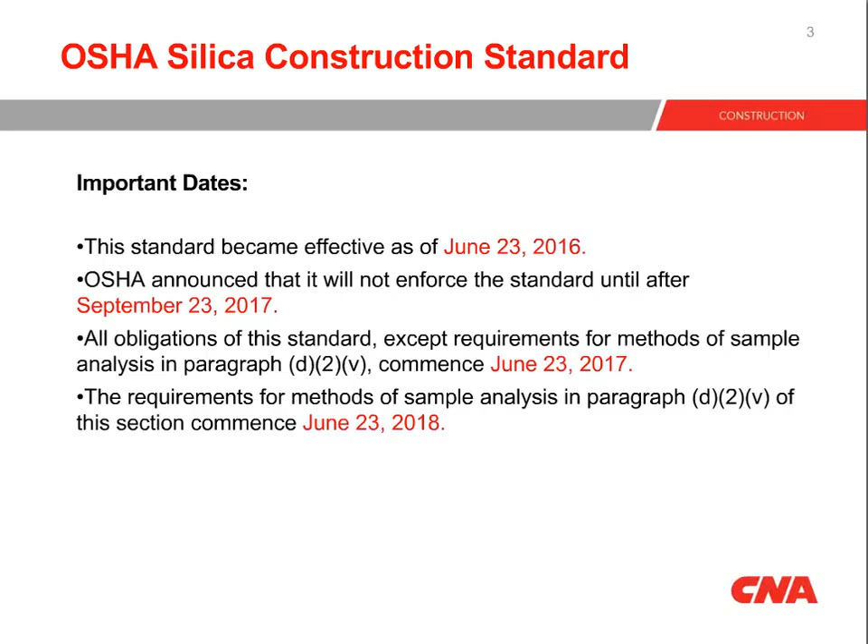Scope and application of the standard. This is what the standard applies to. It applies to all occupational exposures to respirable crystalline silica in construction work, except where employees' exposure will remain below 25 micrograms per cubic meter of air at an 8-hour time-weighted average under foreseeable conditions.

Now, the 25 micrograms per cubic meter of air, that's what they call the action level, which is the level that OSHA requires increased industrial hygiene monitoring to begin at. How do we determine if our construction work is under that action level, that 25 micrograms? Well, the biggest thing we do is air sampling.

We can use historical data, and that's why OSHA established Table 1, which we're going to look at more closely a little later. It's 18 recognized activities where historical data has proved to be over the 25 micrograms. We also can use trade data, air exchange calculations, but basically, if you see a dust cloud, you're probably going to be over that 25 micrograms.

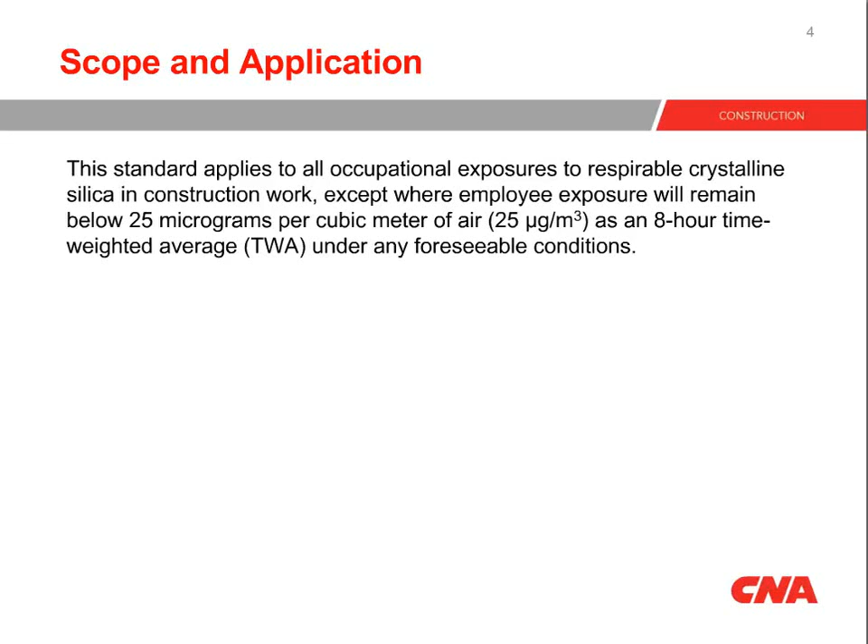Now, if you can prove that the exposure is under that action level of 25 micrograms, then you don't fall under the scope of the standard. But the only real way to prove this is through air sampling. And in construction, we have to be careful of that because our job sites and projects are so dynamic, the conditions are always changing. So what might be good one day might not be good the next, depending on weather conditions.

All right, the requirements of the standard. The standard requires that employers limit worker exposure to respirable crystalline silica above the PEL, the 50 micrograms over an 8-hour day. Now, when we talk about respirable, we mean breathable. The silica particles have actually been processed or broken down small enough to breathe into your lungs, either through grinding, polishing, chipping, that type of thing.

The PEL of 50 micrograms, we have to remember, has been reduced from the original 250 micrograms per cubic meter of air that OSHA has established over the past 50 years. So we're dealing with really 1/5 of the exposure of what we've been used to. We have to establish and implement a written exposure control plan that identifies the tasks that involve the exposures, and we have to implement engineering controls.

Now, the written exposure control plan is really no different than a job safety analysis or a job hazard analysis. In a nutshell, we identify the exposure and we describe how we're going to control it. At an OSHA-sponsored seminar I attended, they provided a website, and we're going to look more closely at this website later on. It's www.silica-safe.org. It actually walks you through completing one of these plans.

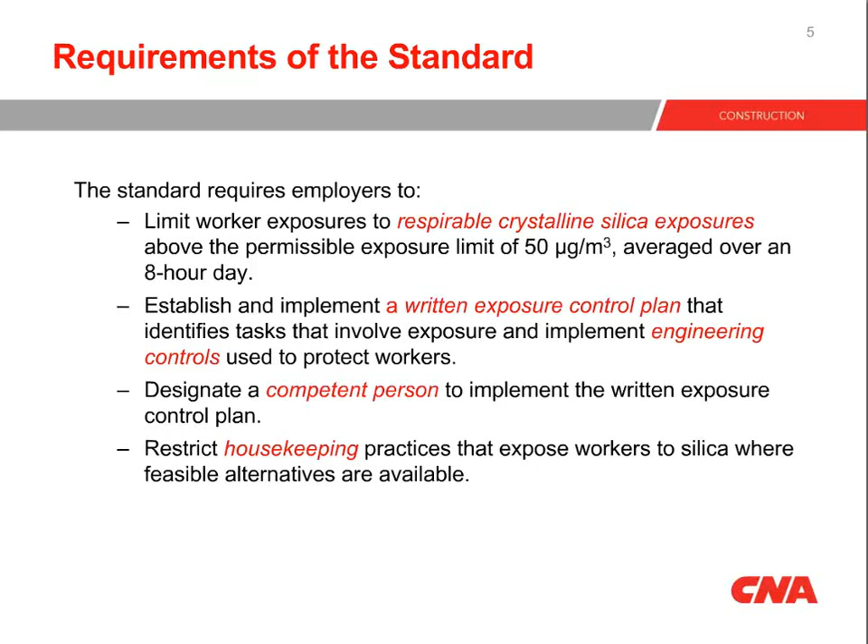Continuing on the requirements, we have to provide respirators to workers when engineering controls cannot limit the exposure to the PEL, the 50 micrograms. Now, when we reference respirators in this new silica standard, it's under the assumption that we're in total compliance and up to speed with the current respiratory protection program that has been in place since, I believe, 2007. We need to offer medical exams, including chest x-rays and lung function tests, every 3 years for workers exposed at or above the action level that wear respirators for 30 days or more per year.

We have to keep records of the workers' silica exposures and all the medical records for 30 years. And we have to train workers on operations that result in silica exposures and the way to limit them. Now, if an employee wears a respirator for 30 days or more a year, we're going to have to follow the medical surveillance requirements. So we're going to talk in more detail about that in a little bit.

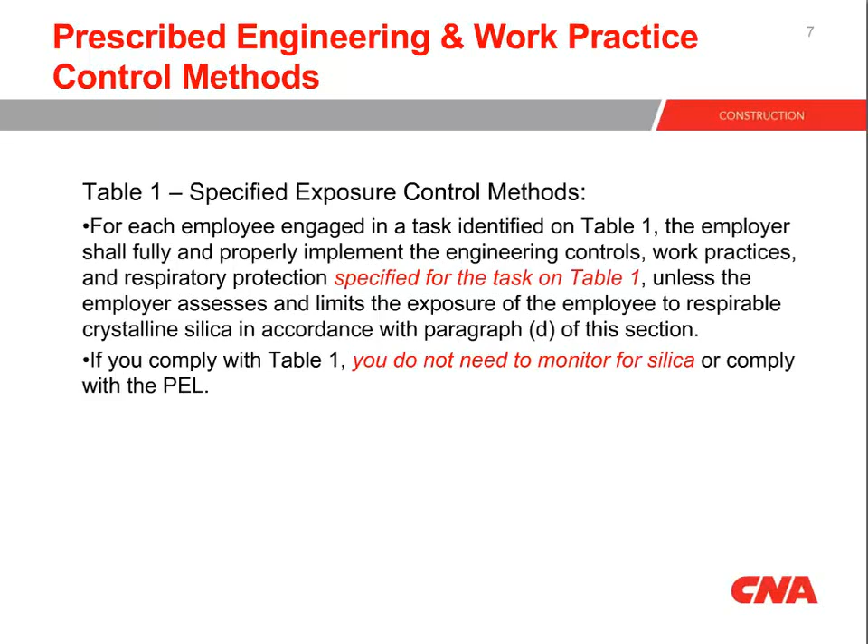Prescribed engineering and work practice control methods. Table 1, specified exposure control methods. For each employee engaged in the tasks identified on Table 1, the employer should fully and properly implement the engineering controls, work practices, and respiratory protection specified for the task on Table 1. If you comply with Table 1, you do not need to monitor for silica or comply with the PEL. Let's look at the next slide here to give you a better idea of it.

Now, this is just a small screenshot of Table 1. OSHA identified 18 common tasks or activities that produce silica above the PEL, and they placed them in a table along with the engineering controls and the respiratory requirements to reduce the silica exposure.

If you look up toward the top left corner of that slide where you see 1926.1153(c), if you go to the OSHA website and put that number in the search engine, it'll bring up the complete Table 1. It's actually 2.5 pages long. If you want to reference the complete silica standard, it's found in the 1926 construction standard under Subpart Z, which is toxic and hazardous substances.

You'll see in this small screenshot here, I've highlighted some boxes in red. How you read this table: if you go down on the left side where it talks about equipment and tasks, you go down to the second item there, number II, handheld power saws. This can be as simple as a handheld gas-powered concrete saw, which many contractors are using nowadays. That's the equipment. Engineering and work practice control methods.

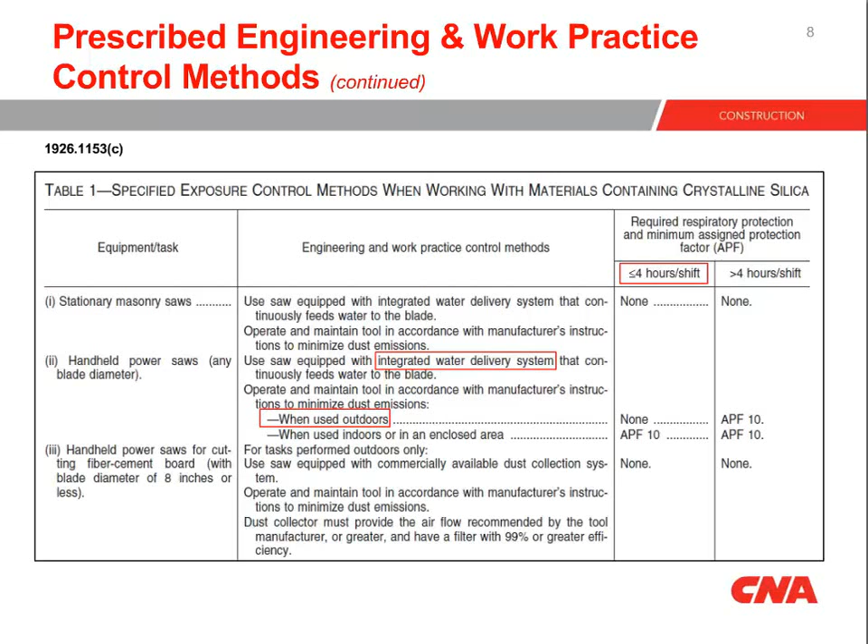All right, these are some initial notes that go to Table 1. If you perform a task indoors or in an enclosed area, provide a means of exhaust as needed to minimize the accumulation of, here it is, visible airborne dust. For tasks performed using wet methods, apply water at flow rates sufficient to minimize the release of visible dust. Again, visible dust. In other words, if you're putting water on it and you can still see dust, we're not putting enough water on it.

The next bullet point there has to do with construction equipment, things like excavators, loaders, any type of construction equipment out on the job site. And those tasks are actually in Table 1. They're the two very last, number 17 and 18, on the last page of Table 1.

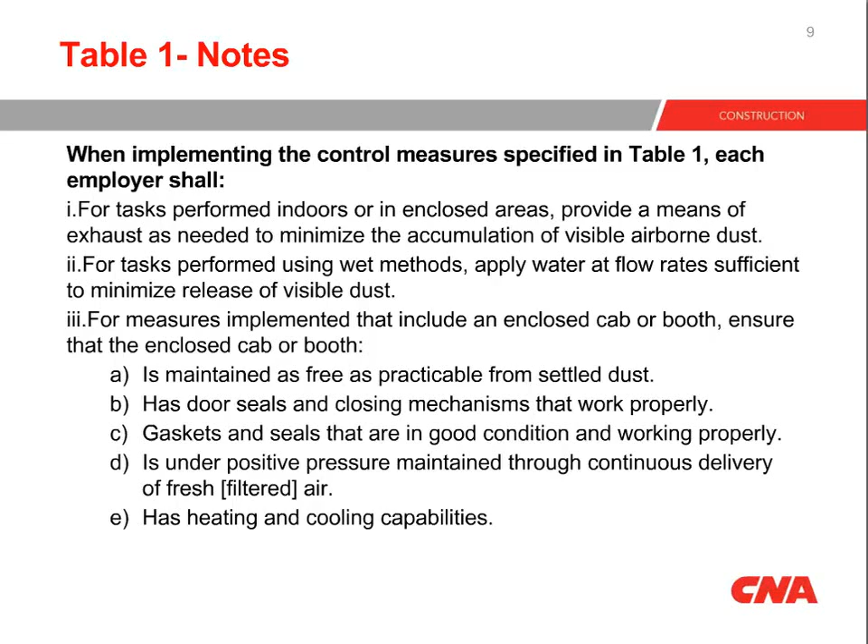They have to do with the equipment, and you need to make sure that you have an enclosed cab or booth, that you have all practical settled dust out of the cab, all of your door seals and window seals are in good shape, positive pressure is maintained throughout the cab, and there's a heating or cooling system provided on it. And again, we're going to answer questions on a lot of these different things afterwards.

So, all right, if the task is not on Table 1 or you decide not to use Table 1, then you have to go to the alternative exposure assessment options, so get ready for air sampling or scheduled monitoring. Hands down, if you can, by all means use Table 1; it's the way to go if possible. I'm going to go to the next slide here that gives a little better interpretation of it.

These are the alternative exposure control methods. You have the performance option and the scheduled monitoring option, and basically they both involve air testing or air monitoring. The scheduled monitoring option is done over an 8-hour time-weighted period, and you will place the monitoring badges on employees. You want to make sure that you select an employee that is expected to have the highest exposure to the respirable crystalline silica.

You can do representative sampling monitoring, which according to OSHA can be around 10%. And you've got to watch out when you do this air sampling, because job sites are so dynamic, which means the conditions are changing from day to day, whether it's the humidity, the wind direction, the speed. What might be good one day might not be good another day, so you really have to watch out about that.

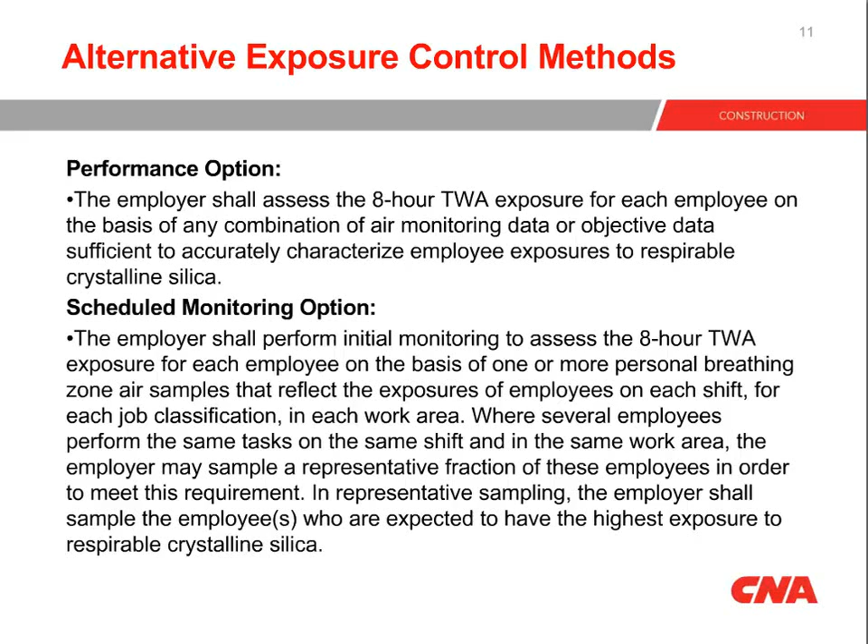All right, if you do conduct the air sampling and monitoring, you then have 5 working days to notify each employee of the results. Whenever an exposure is above the PEL, the employer has to provide a written notification describing the corrective action to be taken to reduce the exposure. And basically the corrective action can be engineering controls or, worst case scenario, respirators.

Air monitoring, the employee's rights. If you perform air monitoring, the employer shall provide the affected employees that are engaged in the monitoring, and their designated representative, which for the most part we're probably talking union rep, the opportunity to observe the monitoring process.

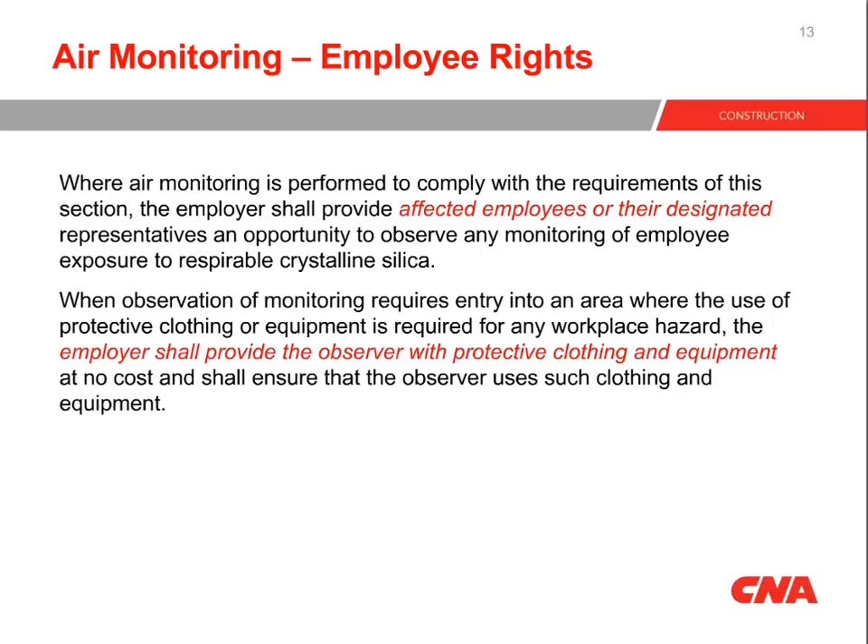If while doing the monitoring there's any specific PPE, personal protective equipment, anything like that that the employee needs or the representative needs, we have to supply that as the employer at no charge. It could be as simple as safety glasses, hearing protection, a Tyvek suit, anything like that.

Methods of compliance. This slide here basically deals with or emphasizes the hierarchy of controls. We always try to engineer out the exposure first, and as our last resort, we resort to PPE, and in this case it's going to be respiratory protection.

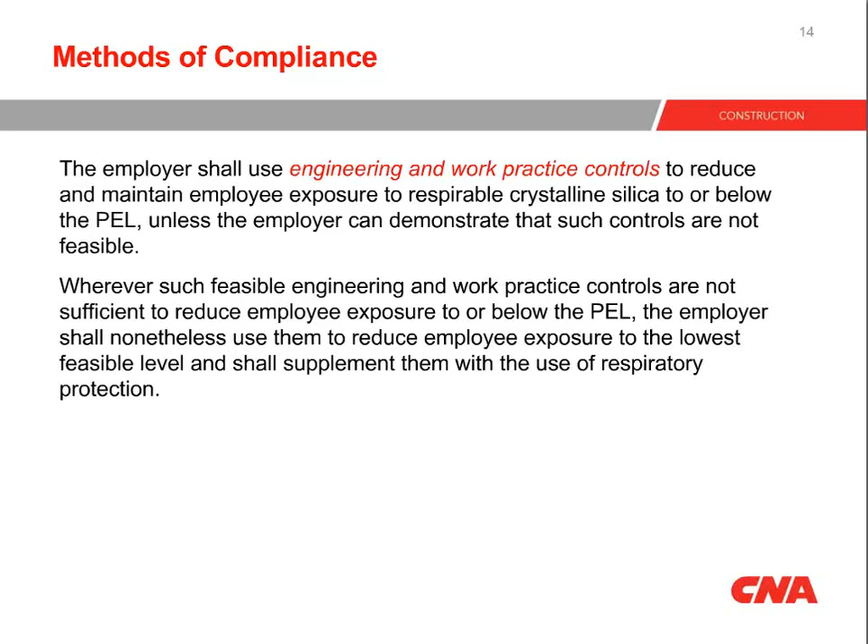Housekeeping requirements. The employer shall not allow dry sweeping or dry brushing where such activity could contribute to employee exposure to the silica, unless wet sweeping, HEPA filtered vacuuming, or other methods are not feasible. We have to be very, very careful when we talk about not feasible on this. It's very difficult to prove to OSHA that using one of the engineering controls is not feasible.

The employer shall not allow compressed air to be used to clean clothes or surfaces where such activity could contribute to employee exposure to the silica, unless the compressed air is used in conjunction with a ventilation system that will effectively capture the dust cloud created by the compressed air. This could be important for concrete grinding or the polishing operations, where the machine's vacuuming system actually collects the dust.

We have to make sure, and the OSHA industrial hygienist also emphasized this when I talked to her, that we need to control the dust when we're emptying the collection bags on the machine or we're cleaning out the filter. It doesn't do any good to go through the process of collecting all this dust and then at the end of the day have that high concentration of dust and expose the employee to it while we're cleaning the bag out or the filter. So that's something to make note of.

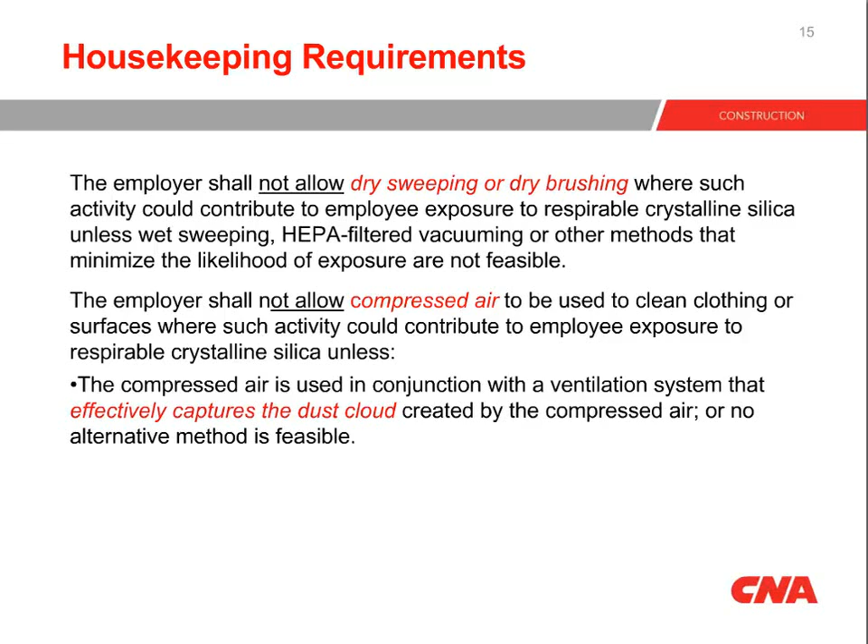All right, let's talk a little bit about the written exposure control plan. A lot of people have a problem with this, trying to figure out, oh my God, what is that? How are we going to develop it? Well, we're going to help you with that. The employer shall establish and implement a written exposure control plan that contains at least the following elements.

We need to describe the task that involves the exposure to the silica, whether it's grinding, polishing, chipping, anything that's breaking down the silica particles so they're breathable. We need to describe the engineering controls, whether we're going to use water or a vacuuming system, work practices, if we're going to use respiratory protection, and the housekeeping measures used to limit the exposure, not only to our employees, but we might be on a multi-employer job site.

And again, this written exposure control plan is much like a job hazard analysis. Here's what the exposure is. Here's how we plan to control it.

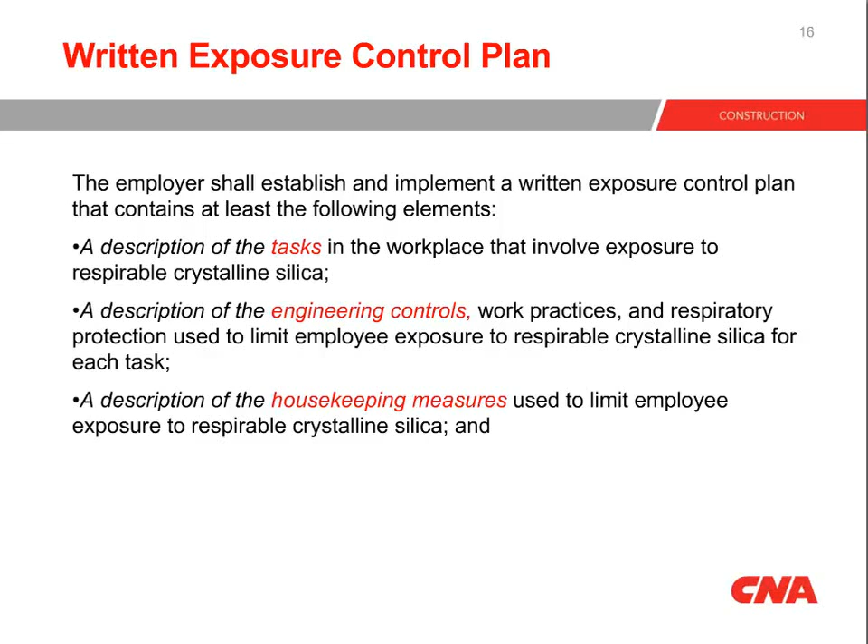Continuing on with this plan, a description of the procedures used to restrict access into the work area when necessary. Again, we might be on a job site where we have a lot of different trades. We have to make sure that we control the dust that we are producing for everybody. That might be cordoning off the area or restricting access into the area where the operations are happening. We have to designate a competent person.

There's a lot in these last two slides about this written exposure control plan, and this is a big part of this whole silica standard for construction. I mentioned earlier that during one of the OSHA-sponsored seminars I attended, they provided a website, www.silica-safe.org, that actually walks you through completing the plan. While CNA doesn't officially endorse this website, I signed into it, completed a plan, and found that it was a very simple process.

I've been encouraging all the contractors and clients that I work with to do the same. To get on the website, develop a plan, use it as a template for future exposure control plans. Because for the most part, what we're doing day in and day out is not really going to change. So that plan is going to be able to be used over and over.

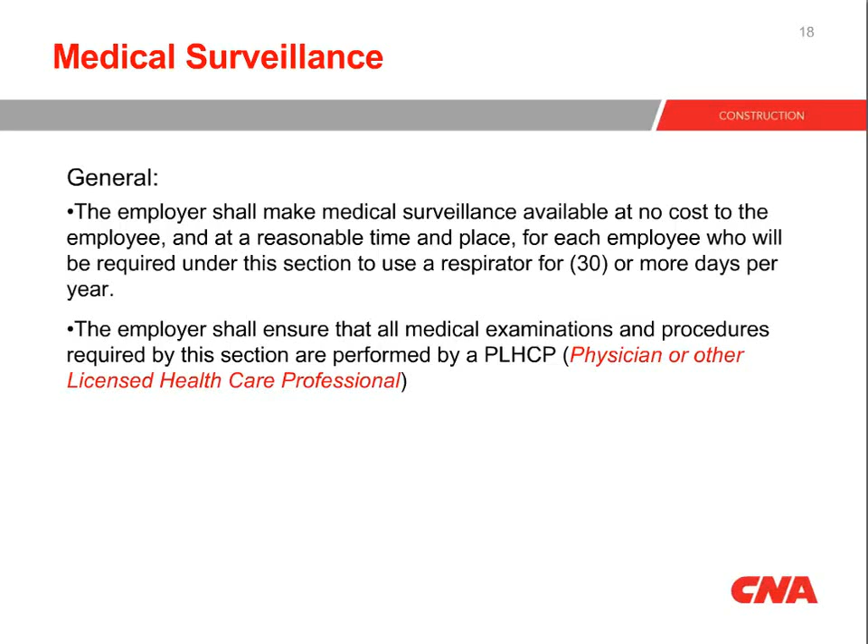Continuing on the medical surveillance. The employer shall ensure that the physician or the healthcare professional explains to the employee the results of the medical examination. Now this is only to the employee, all right? You have to contact the employee within 30 days of the medical examination. A statement, which only the employee gets because of the HIPAA laws, is going to indicate the results of the examination, to include any medical conditions that the employee might have that would increase the health risk for exposure to silica.

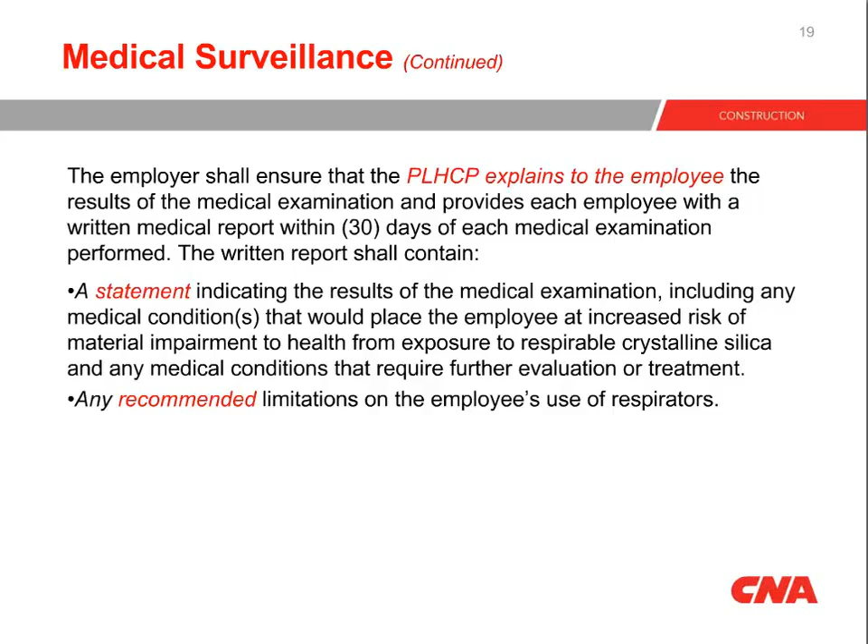And also, the healthcare professional or physician has to provide a recommendation within 30 days to the employer on any recommended limitations of the employee using a respirator. One more slide on medical surveillance, continuing on that. And this is basically for the employer. Any recommended limitations on the employee's exposure to the silica has to be made in a statement.

I tell you, if you get a statement from a physician or a medical professional that says that there's going to be complications if this person wears a respirator, due to the additional cost and the additional tests and that type of thing, I would highly recommend that person probably should not be one of the people designated to wear the respirator. Because eventually that's going to mean more cost to you as the employer.

The employer shall obtain a written medical opinion within 30 days. The written opinion shall contain the date of the examination on the employee, a statement that the examination meets all the requirements of the Silica standard under this section, the medical surveillance, and any recommended limitations on the employee's use of a respirator, or that there are no limitations on that.

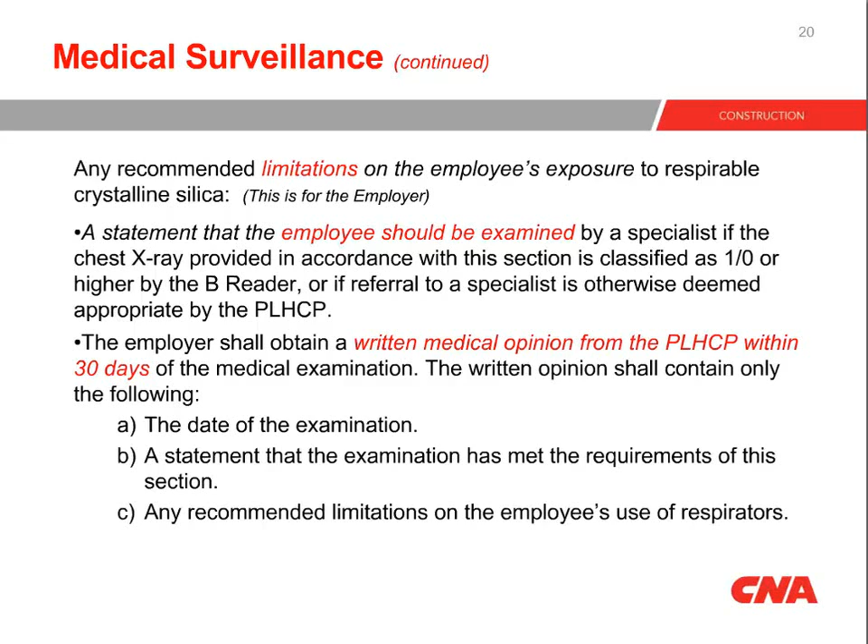Employee training, which is much like other OSHA standards. Okay? We want to make sure that we train our employees. Well, first of all, we want to make sure that as an employer we're following the hazard communication standard. That should be day one when an employee is hired in, new hire orientation. Train them that we have a hazard communication standard and these are the parts of the standard. We need to make sure that we include the respirable crystalline silica in this program.

We need to make sure also that we let the employee know in the employee training of the potential hazards and health hazards of crystalline silica. Cancer, lung effects, immune system effects, kidney disease, COPD, silicosis, lung disease, that type of thing. One of the things the OSHA industrial hygienist suggested is that if you're cutting a concrete product, you definitely should have an SDS on cement in your hazard communication binder.

Continuing on employee training, again, we need to make sure that the employee knows the health hazards associated with silica. That might give them a much better idea that, hey, we need to do things right. I need to follow the controls. I need to make sure I'm wetting down or I'm using the vacuum system correctly or I'm using the respirator properly. We need to let the employees know the specific tasks. When you're grinding or polishing or cutting or whatever, we're going to need to follow the particular control methods, engineering controls, to limit your exposure to the silica.

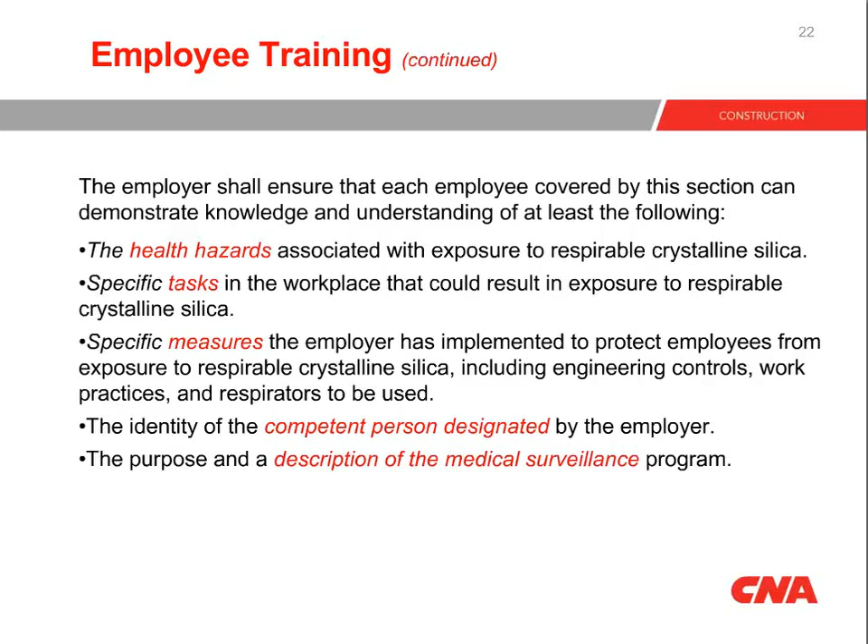All right, winding down here a little bit. Record-keeping guidelines really are no different than other standard requirements. We want to make sure that we keep all of our air sampling or monitoring data, any of our objective data, whether it's air exchange calculations, industrial hygiene testing results, that type of thing. We want to keep all the medical surveillance records on every employee covered under the medical surveillance. And again, everything has to be maintained a minimum of 30 years.

All right, this right here, gang, is probably one of the best publications I think OSHA has ever put out. It's a small entity compliance guide. It was published in November of last year. Don't let the name fool you; it's good for all size companies. This publication walks you through step by step the requirements of the Silica standard for construction. It walks you through everything on table 1. It gives pictures and examples of the different tasks on table 1. It gives you suggestions on the engineering controls.

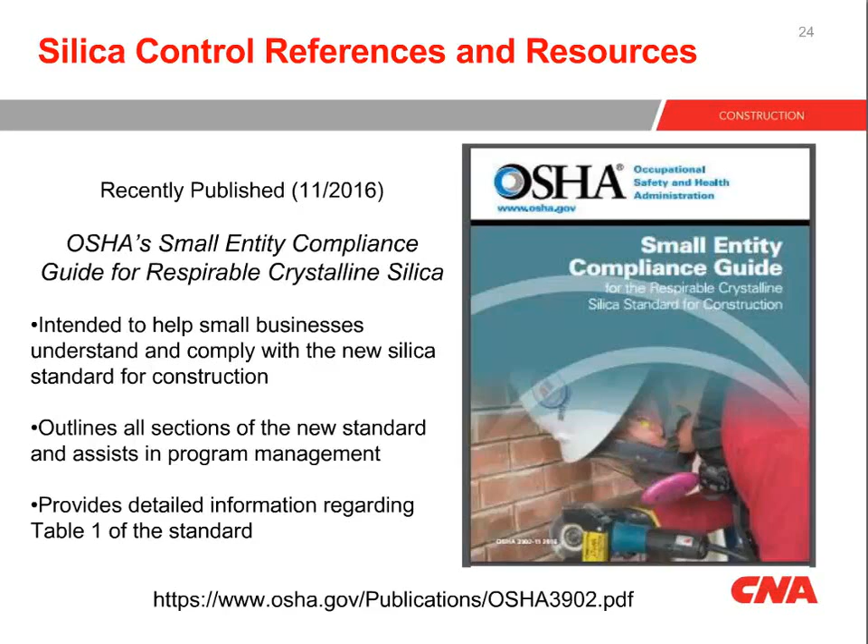It's going to ask you different questions regarding the type of material you're using. Concrete, clay, whatever type of material. You check that box. It's going to ask you what the task is, what are you doing? Are you cutting, grinding, chipping? It's going to ask you what type of equipment you're going to use. If you're going to use a saw, is it a stationary mounted saw? Is it a handheld mounted saw? Is it a polishing machine? That type of thing. And they're going to ask you what you're actually doing on that.

At the end, you're going to be able to print this out. And I've been encouraging all the clients that I work with, get on this website, fill it out. What's neat about this website, too, as you go to the different checkoff boxes, you might not be sure what type of verbiage you want to put in it. They've got a drop-down box on some of the boxes. You can click on that, and it gives you examples of the verbiage, what OSHA is looking for, what needs to be maintained in that box to help you out. At the end, you click on Save, and you can print it out.